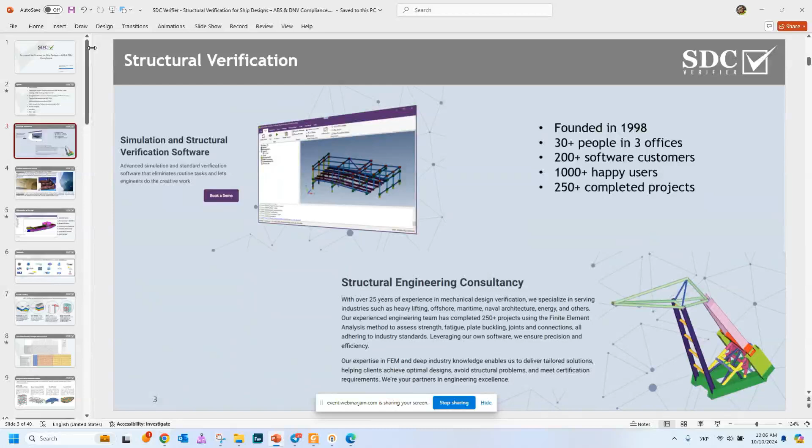So let's go to the next and start talking about the problems in the maritime industry. In the maritime industry, engineers are faced with two common challenges: plate buckling and fatigue cracking. Plate buckling occurs when the structural plates are subjected to compressive stresses, which can lead to local and sudden deformation, and a high risk during operations.

Fatigue cracks involve progressive damage from repetitive loading over time. So both these issues require careful attention during ship design, as well as when we do the FEA verification, taking into account the standards requirements. So in order to be sure that your design is safe enough, I would like to present you SDC Verifier software.

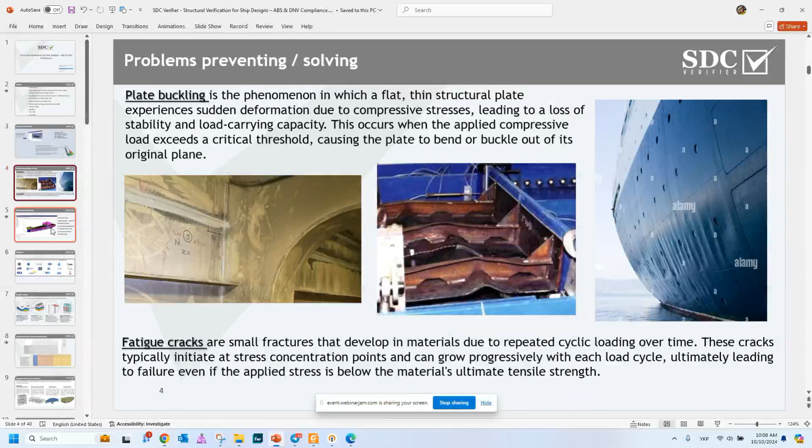Then this geometry can be meshed, and beam, plate, and solid elements can be used for this structure. Then, in order to execute the verification, we can recognize our structural members. In this case, these are plates, stiffeners, welds, and so on.

We can assign loads and constraints in our model and do verification, which takes into account Simcenter Nastran solver. In order to do the standard check, we have an extensive library, and I think each user can find the proper standard for them. After that, when we did all these steps, we can grab all this information in the report designer. We can open our report designer, put all this information in and generate it for a complete view of what we did and what the results of our structure are.

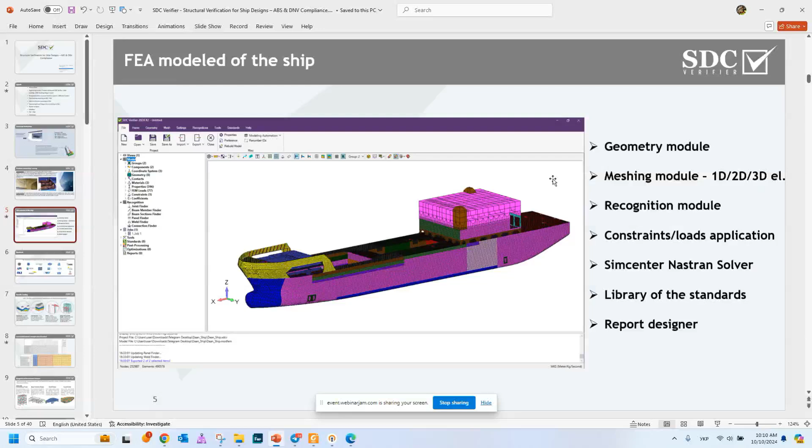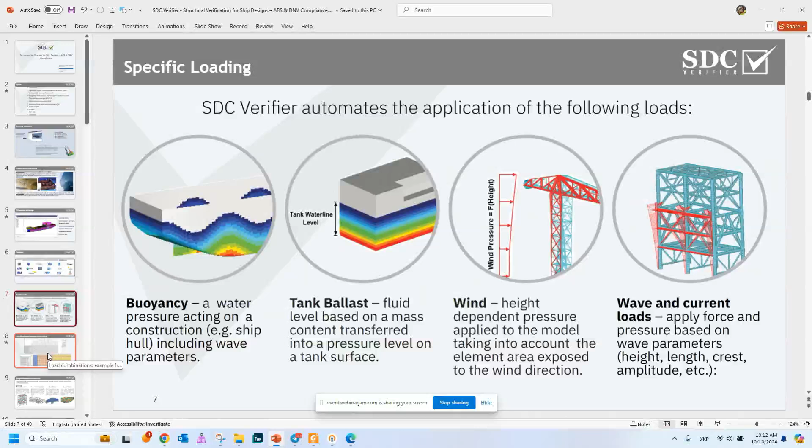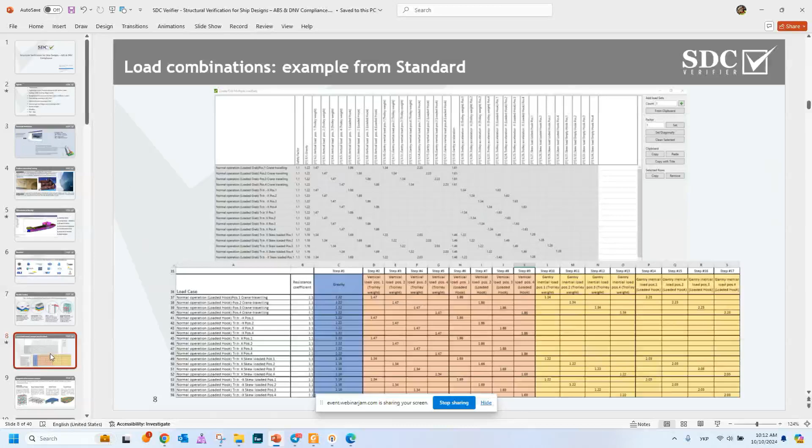After we apply our loads, we need to go to the next step. We need to predefine our load combinations. In SDC, this is really simple because there are several options to deal with it. First of all, we can prepare our load combinations in a spreadsheet and then simply copy and paste them into SDC Verifier, or we can use our predefined load combinations, which can speed up the process of preparing load sets. Once we prepare our load combinations, we need to recognize our structural members. The next slide shows information about the recognition tool of SDC Verifier.

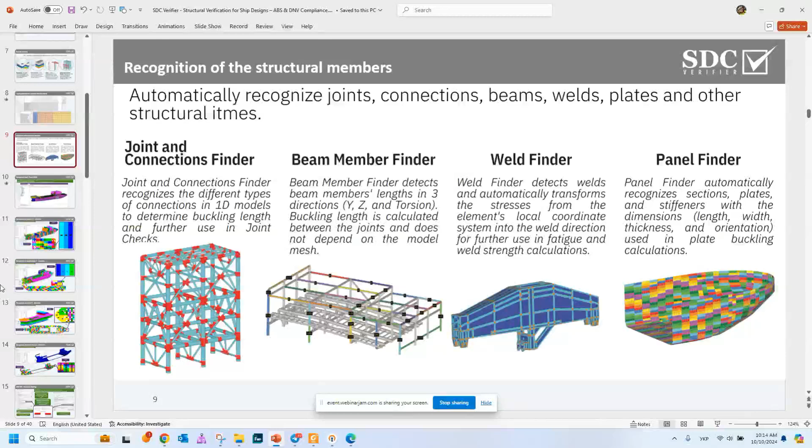So basically, that's how our step by step looks. First of all, we need to prepare our model and apply our loads and constraints, then we create load combinations in accordance with the standard, which take into account the partial safety factors and dynamic factors. We recognize our members, and then we conduct the verification. This window shows us the recognition ribbon, and here you can see several options to recognize our structural members. We can simply press recognize all, and SDC automatically recognizes all possible structural members in our model.

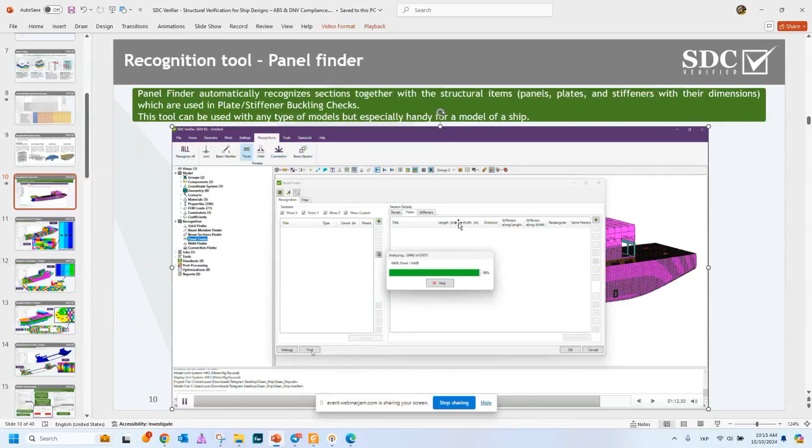Right now, this video shows that we are recognizing only plates, sections, and panels here. For this model, as you can see, this is how much time we need to recognize it. It's almost 40% already recognized. That's the main window of the panel recognition, and here you can see information about the sections. Our sections can be in X, Y, Z, and custom sections, and these sections can contain panels, plates, and stiffeners. To recognize all the panels and all the plates, it took around 1 minute for this complex model.

So I would say this is not really a long time for that. By the way, after the recognition of our sections, we can play with checking them, and we can also highlight them with different colors.

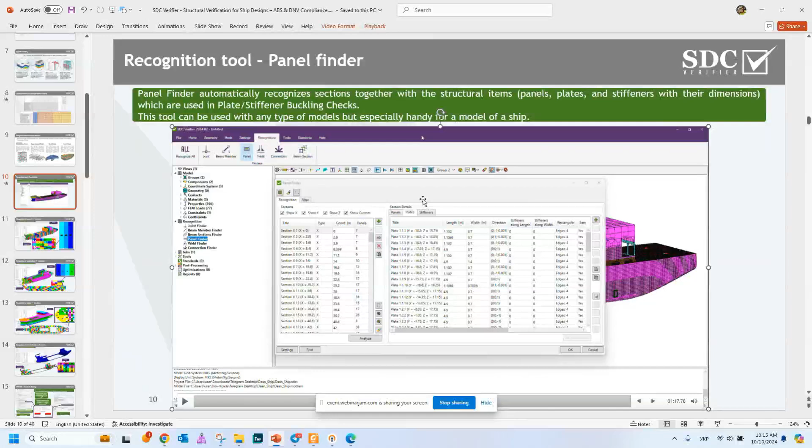What I would like to show you right now is, if we go to section X and highlight them, you will see that we highlight all the frames in the X direction. So all these sections which are normal to the X direction are highlighted and recognized in the way that we recognize our section, then our section is divided by the panels, and our panels are then divided into plates.

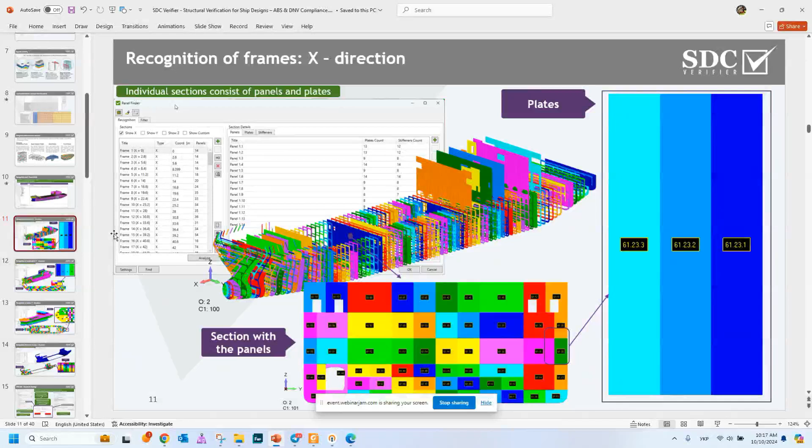So all the plates are automatically recognized. We take into account proper distance, proper geometrical characteristics like width and length, and also we extract information about the plate thickness in order to have the complete picture of it. So that's information about the panels which we recognize in the X direction.

Then the same logic is for the Y direction. So we show all the panels, all the sections which lie normal to the Y global coordinate system. Then we can highlight our sections and panels in detail.

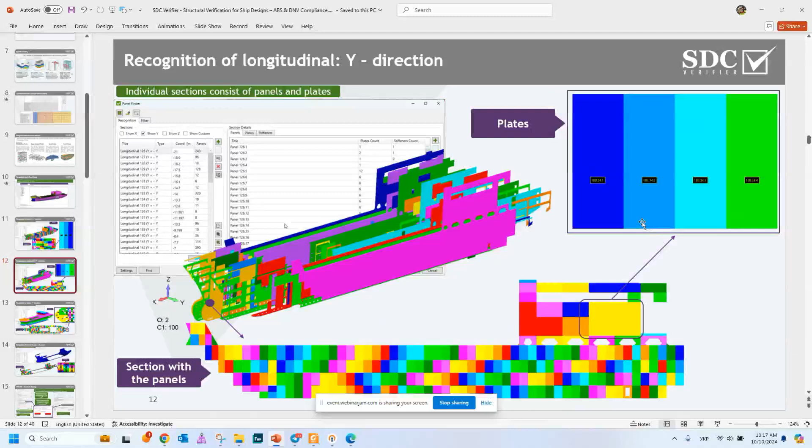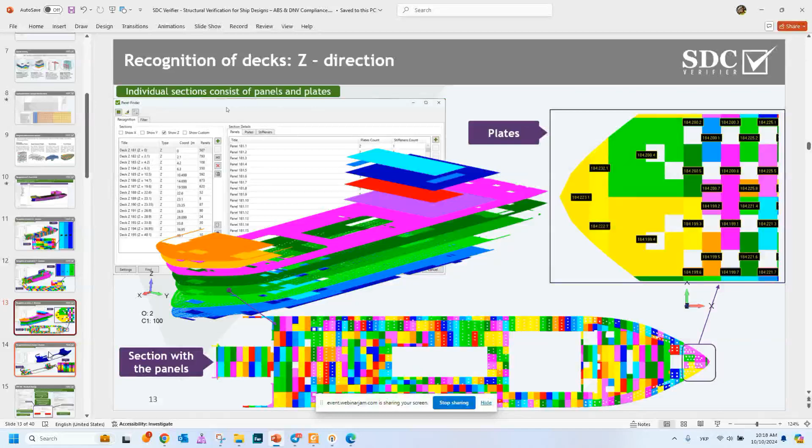Okay, so let's go to the next, and here this is quite interesting because the previous slides show us the sections which are aligned in the global coordinate system. But don't be worried about surfaces which are not aligned globally, like inclined directions or inclined surfaces. We can also automatically recognize it, and this is the proof of it.

It's called the custom sections, and in the custom section we can also recognize our members.

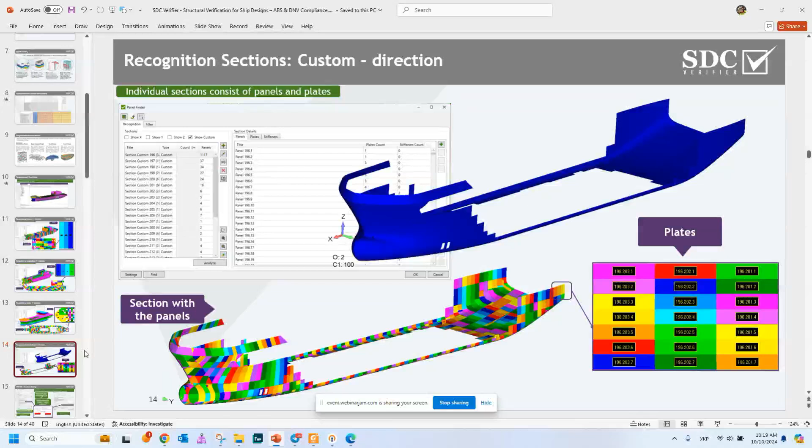Okay, so after that, when we recognize all the panels, plates, and stiffeners, we need to go to the standard window and add the new standard to be verified. So from the left and right sides, I show the two wizard windows of the standard, which should be predefined before the verification. Let's walk through this in detail.

I would say these standards, DNV and ABS, are quite similar because the logic is the same. We take into account our compressive force and compare it with the resistance, which is based on geometrical characteristics of the plate.

So first of all, I would like to focus your attention on the resulting material factor. In DNV by default this is 1.15. In ABS it's 1, but it can also be adjusted by these choices. Then we have material with yield.

That means that if we have 0 from both sides, our yield is properly assigned, and here is an explanation of it. These options are present for both standards, here and here.

Then we see the selection, so we can conduct our verification for a portion of the model, so we don't need to calculate the full model if we know for sure that everything is fine for the rest of the structure. We can specifically focus on some proper location for us.

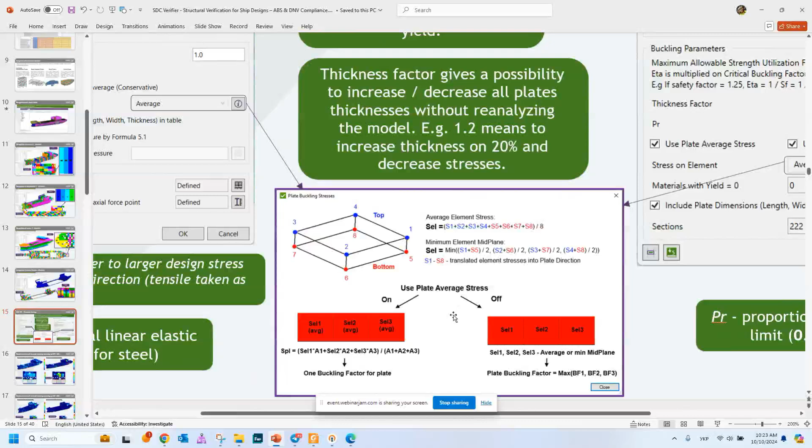So we will sum up our stresses and divide by the area. And another one is to find out the minimum element mid-plane stress, which results in membrane stress, and this allows us to calculate plate buckling without the local bending.

That's about the average and elemental methods. So the elemental method allows us to estimate, I would say, the local effect of our loading, and that's also good to know, having the possibility to check the global and local effect on our plate.

We can also calculate our shear load as an absolute value. In this case, we will consider the conservative scenario of the shear loading.

Probably, yeah, that's about the plate setup. I think that's it. And about...

This stiffener buckling - if we have a stiffener in our structure, SDC can also perform the buckling verification, but we need to predefine the Psi factor. This factor is the ratio between the smaller and larger design stress, and SDC will calculate it automatically.

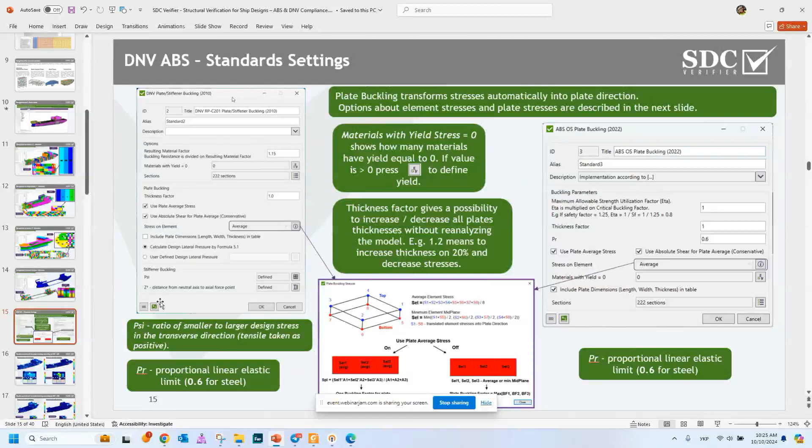And this is the distance - I see that this is an error on my slide, but it can be adjusted. This is the distance between the neutral axis of our stiffener and the bottom flange of the plate. This distance can also be automatically determined by SDC, so you don't need to fill in all this information manually. Basically, that's about the setup of our standards for the buckling verification.

Now we can see the results, and for all these slides with results, I'll show you the results for both standards so we can compare them for the same sections, panels and plates. As you can see, the results are quite comparable, but they cannot be exactly the same since different standards require different load combinations, partial safety factors, and different material resistance, which we talked about previously.

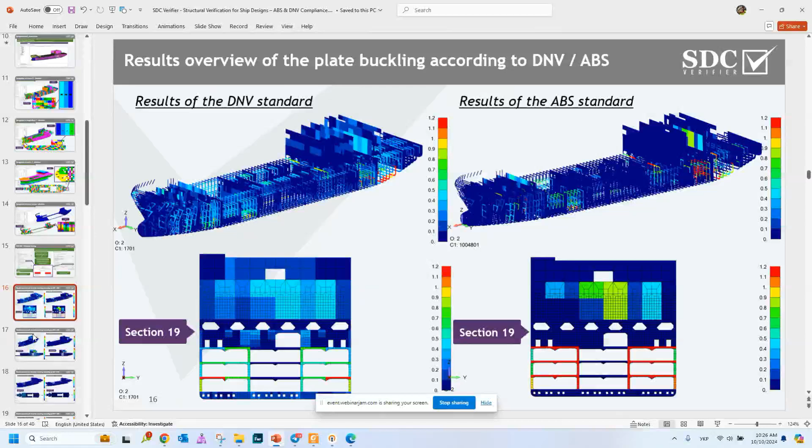So this is the results for our frames. Then we can go to the results of our longitudinal panels - as you can see here, they highlight almost the same locations.

Then we can see the results of our decks. According to ABS, the decks showed slightly better results, I would say.

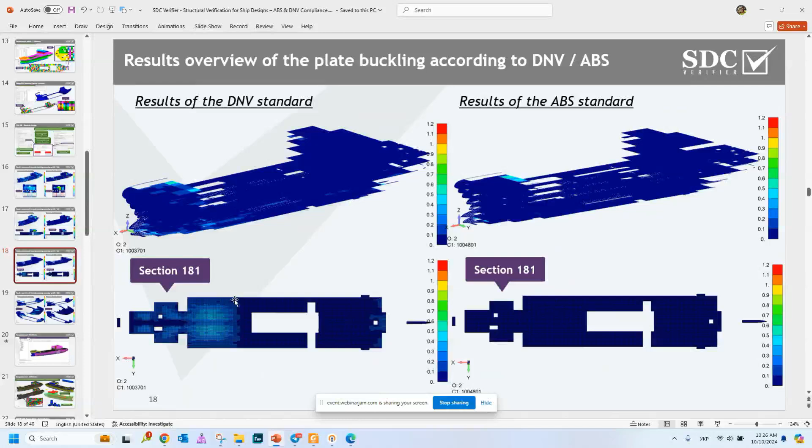And the last slide with results is related to the custom sections. As you can see, we are safe with these results, and everything is dark blue, meaning there is a lot of reserve capacity for this structure.

Okay, basically this is about the buckling verification we take into account with the SDC Verifier, and I think we can go to the next subtopic - verification of the fatigue. Let's go to the next slide.

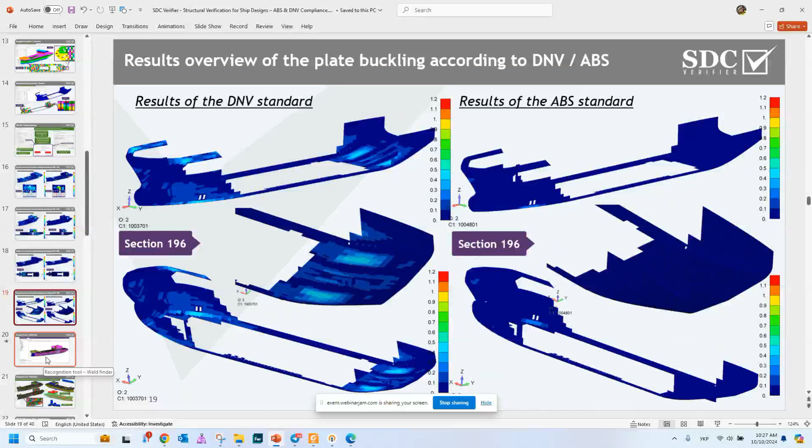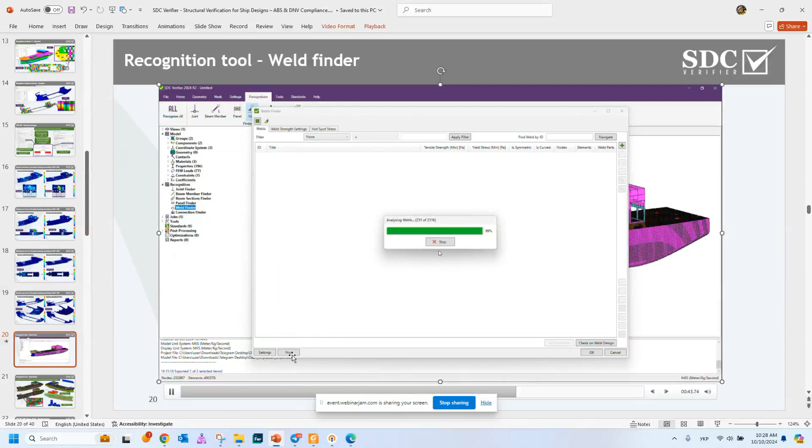We can play with the selections. We can adjust non-welded properties - for instance, for rolled sections, we can edit, combine, and so on. We can edit, remove, or combine our welds, so that's also an extra benefit. We can make some modifications with our welds, highlight them just to visually check it, and that's the list of our welds on this screen.

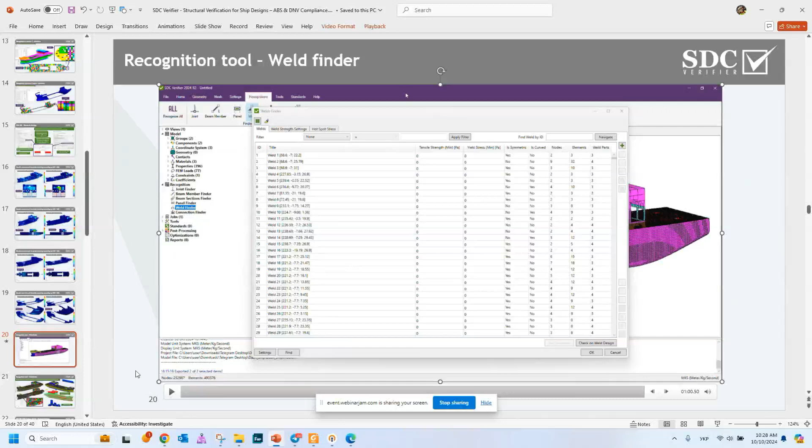Let's go to the next slide and see how we can highlight and present them. Here you can see that all our welds are recognized and can be highlighted in different colors. It shows you information about each of the welds - we can highlight them with ID numbers, so we can specifically focus on those welds.

Also, SDC allows you to automatically recognize welded and non-welded properties. This is really important for the fatigue and weld strength check, because for non-welded properties, the fatigue weld strength can be higher than for welded properties. So all this variation is possible with SDC.

By the way, I forgot to mention that all stresses in the weld are automatically converted from the local coordinate system of the element to the local coordinate system of the weld, so we don't need to do it manually - SDC does it for us.

Also, what's important to know is that SDC can recognize all weld intersections, since the weld intersections are the weakest point in our structure.

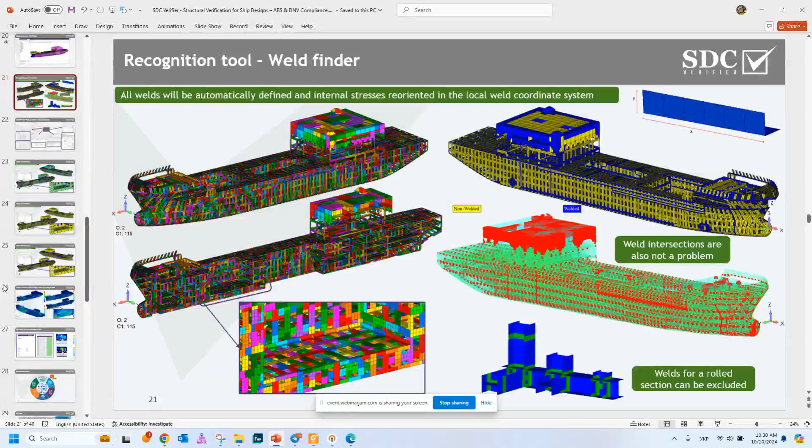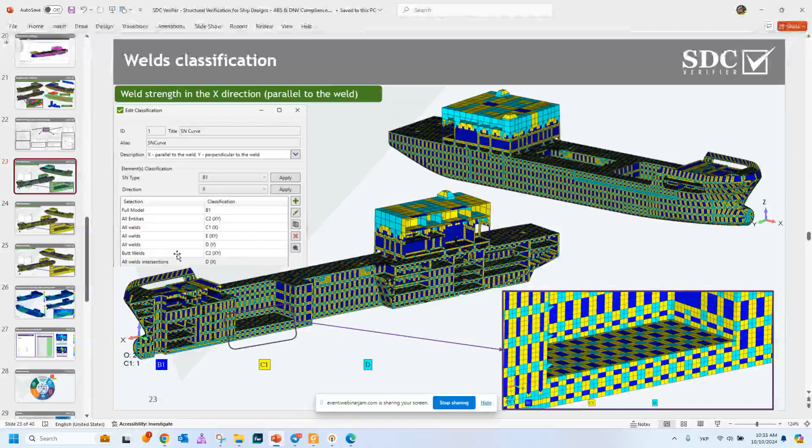In this case, our intersections will be checked with the lower quality, which allows us to estimate the fatigue level as precisely as possible. This fatigue classification is conducted for all directions - parallel to the weld, perpendicular, and shear. The logic is the same, but we have different weld strengths highlighted.

For the y direction and for the full model, we have the same B1. For all welds we have quality D, and for the shear direction we have quality E. So that's about the fatigue classification. As you can see, all this table is based on the standard, and we can highlight it just to check if everything is properly recognized.

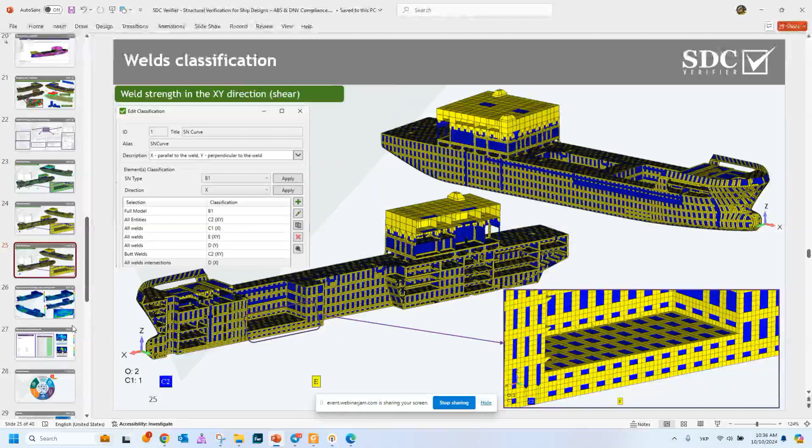Then we can go to our results, and here I would like to present you information about the results. SDC has various options for how to present them - we can present with the full model, or we can present with only our welds. From these pictures you can see where we have our welds, it shows us the information that our strength is lower and results are higher for those locations.

But if we are focusing at the location where we have intersection, for instance here, you see that the results are much higher compared to the nearby zone, and this looks reasonable since this location is a stress concentration point, and it can lead to the higher stress and delta stress value for those locations. So this is general pictures and information about the fatigue verification for the ship structure.

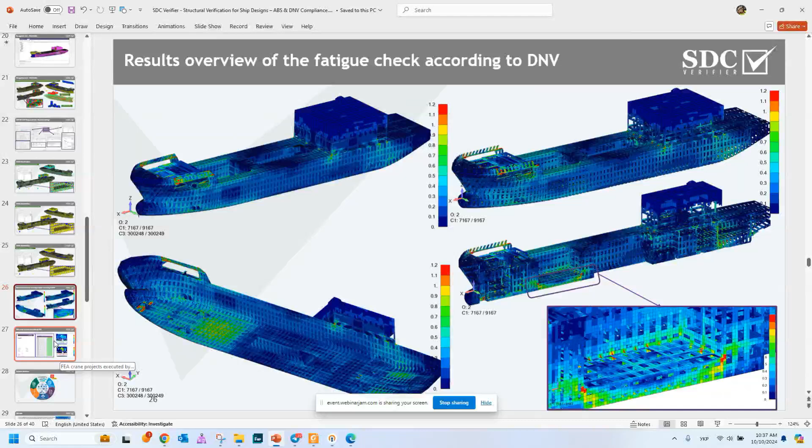So after that, when we conduct all these standards and check our structure according to regulations, what we can do, we can prepare the reports. We can prepare results report to present our results for panels, plates, stiffeners. We can prepare our report for the fatigue verification. Besides that, it's also possible to highlight what load set and constraints are assigned to our model.

So SDC allows you to execute two types of the report. This is the model setup and results report. So you can collect all information about your calculations and store it in your engineering library or deliver directly to your client. So everything can be stored, and during the time you can easily check it and find out information what was done in this project.

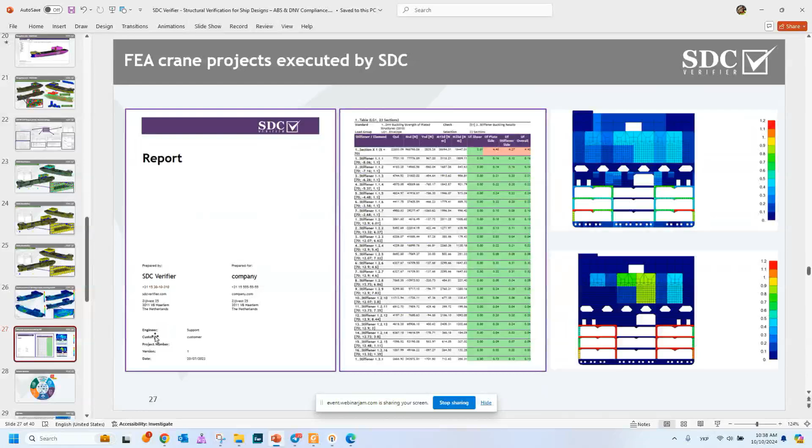Then what we need to do, we need to predefine our load combination based on the standard requirements. After that, we go to our recognition. We recognize our structural members, which we would like to verify. Then we do the code checking according to the standard and automatically prepare the report for our structural members, components, or FEA model. So that's how it works.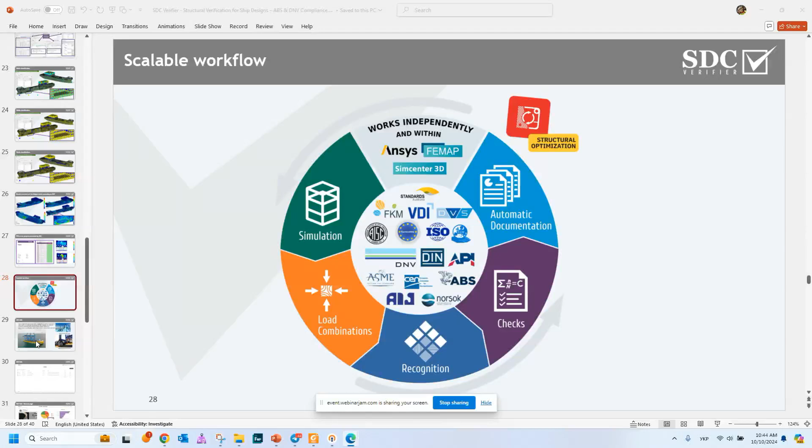Okay, so basically that's about the buckling verification and the fatigue verification for the ship structures. And the last subtopic which I would like to present to you is something new, I would say, but really important and crucial for all types of structures. So this is SDC SAM. What does that mean?

If we conduct the verification for the steel structure, I would say this is not enough to see the global picture of our structure and to know how much time it can be operating. So for this purpose, we're developing our software, which allows us, based on the FEA calculations, to receive the peak points of the structure, check them during the inspections, and after that, track them in real life to see the global picture of this structure.

So this is also really important if we have not new structures, since old structures require regular maintenance and verifications, but using SDC SAM, it becomes really comfortable to track the structural state, and then we can see how long it can be operated.

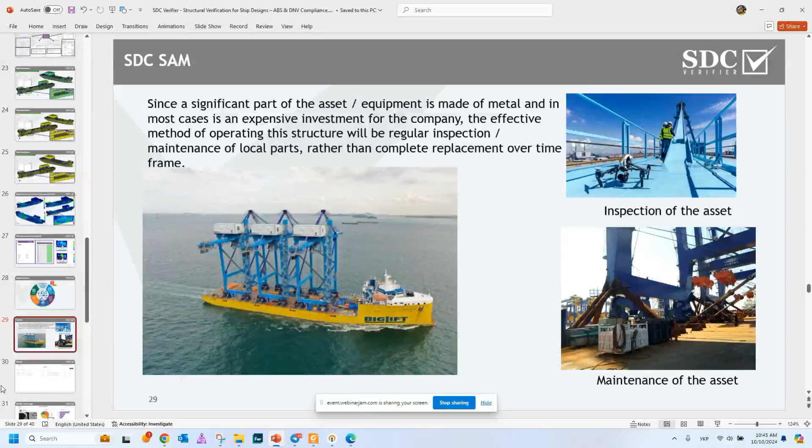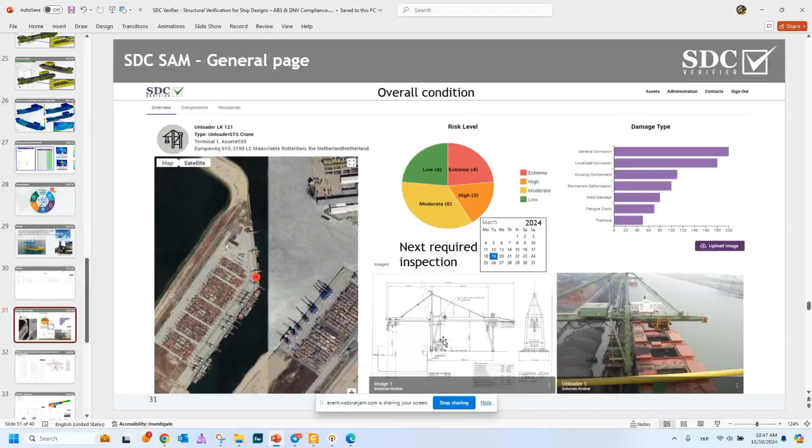So basically, that's the main logic of this asset management tool. If we want to know more detailed information per structural component, we can go to our components and see information about structural components in detail. So here we can see that we have boom, bridge, pylon, and so on. We can see the maximum utilization factor that came from the FEA calculations. We can see the health status, last inspections, and days to the further inspection.

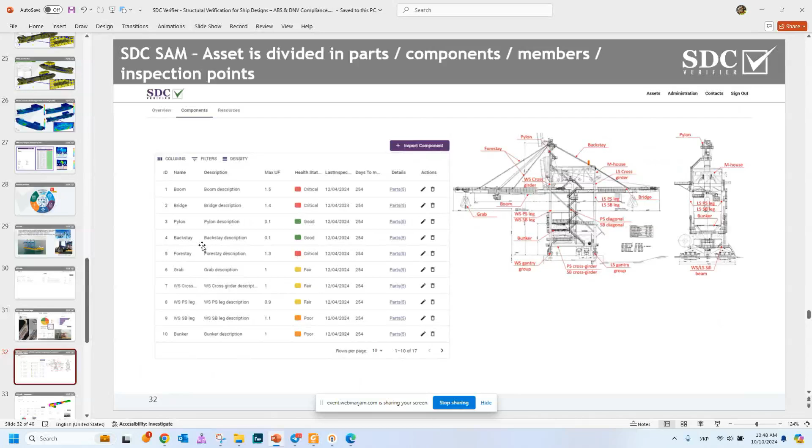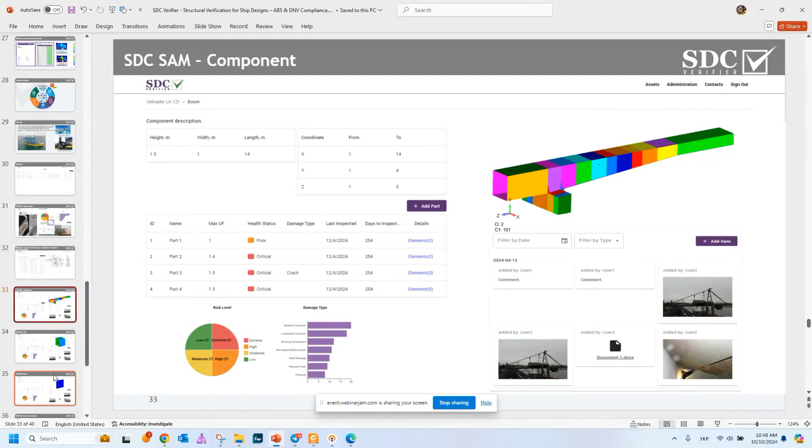So this is the global picture per subcomponent, I would say, but it's also possible to dive deeply and see information for one component. And if we go to this slide, we will see the part of our crane or our structure highlighted in different colors. So this is like a navigation plot, which allows us to see what part we would like to track. Then some statistical data about the risk level and information attached during inspections, some comments, some photos, files, or maybe some NDT inspection can also be attached to this component.

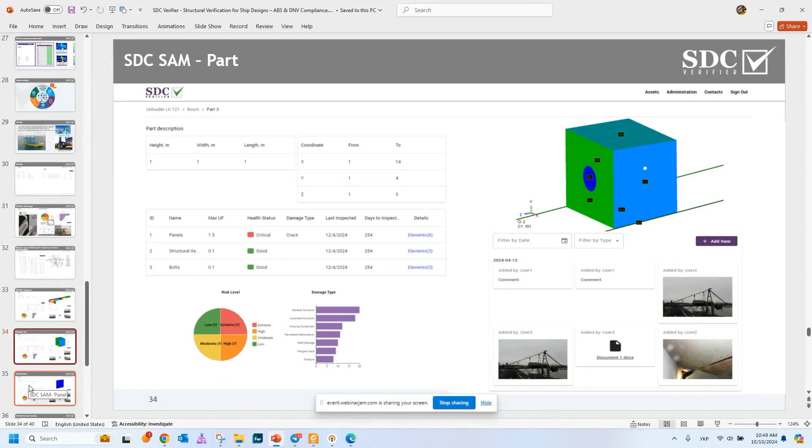Then if we go deeper, we will see more detailed information about the part of the previous component. We will see how many panels, structural items, or bolts it contains. And yeah, we can go deeply and gather more and more information about this structural component. So if we go down, we will see the panel. This panel contains 3 welds, 5 plates, and 3 stiffeners. So this is the general info about the panels.

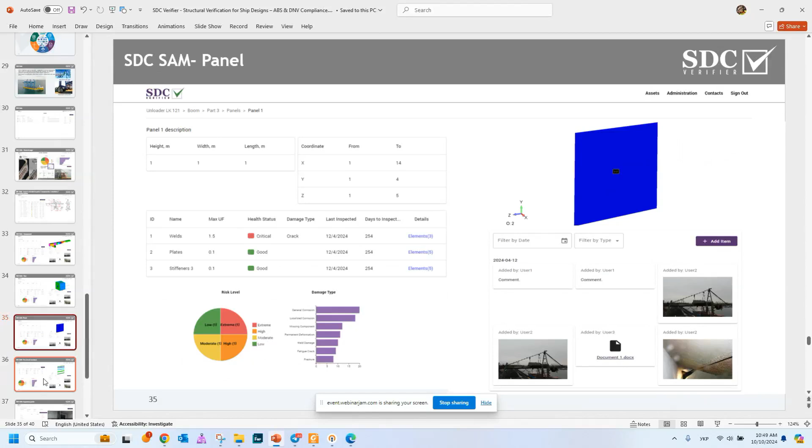And here we can also go deeply and see information about our welds. For our welds, we see what the maximum utilization factor was based on the FEA calculations. We can see the data about the damage, what was found during the inspections, and the last inspection date. But also for this weld, we see that we have 3 points of interest or inspection points, which need to be checked during the inspections.

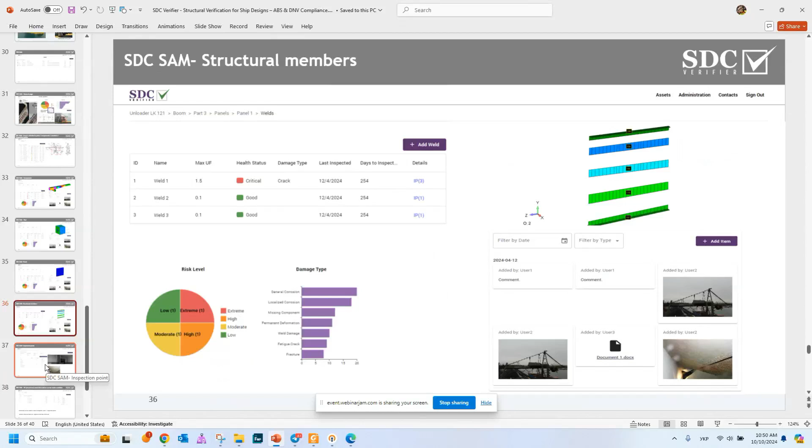And if we go directly to this weld 1, there will be detailed information about what utilization factor is used, what material is used, the thickness of the welded plate, and information about the damages which were found during the inspections. We can see the original value, like original data before the inspections. Also, we can find the pictures with detailed photos for this location.

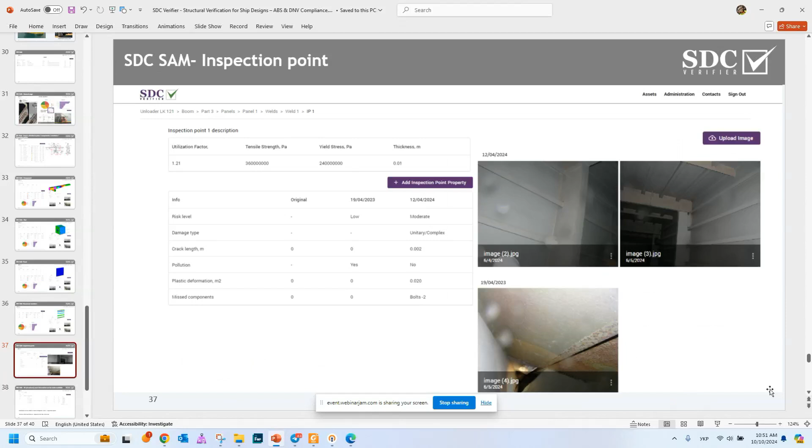So basically, these are the levels of detalization for our structure. So with this software, you can easily track each component of your structure and automatically understand the risk level and how long it can be operated over time.

So then we see the ribbon with the resources, and here can be uploaded information about the reports, FEA models, drawing links, and PLM systems. So that all will be possible with the SDC SAM.

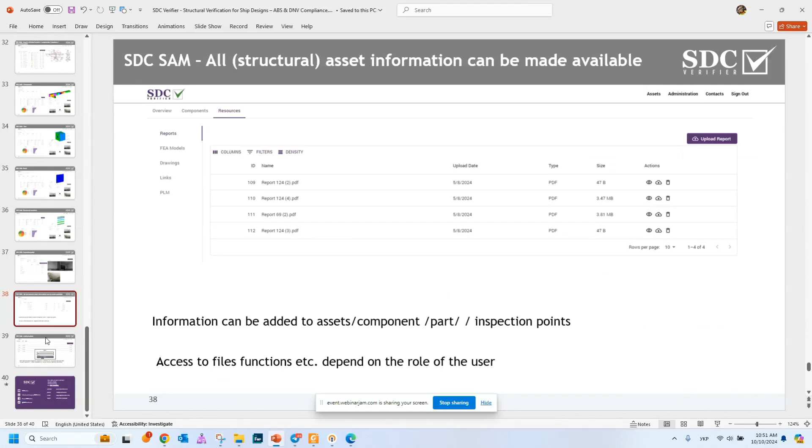And the last slide is related to the authorization. For sure, we are going to have different roles for this platform, since different roles will have different access. For instance, inspection cannot see all the information, while the admin can allow some permissions to the inspection or share some information with potential clients. So all this will be integrated as well in our web version.

Okay, so I think we covered everything during this session. Just to sum up all these topics, SDC Verifier is focusing on three main directions. The first is engineering consultancy service. We provide our clients with, I would say, excellent engineering service. We conduct the verification using FEA methods, preparing detailed reports which are delivered directly to them.

The second one is developing our own software, called SDC Verifier, which helps engineers speed up the process of FEA verifications and makes your life easier by omitting the routine work.